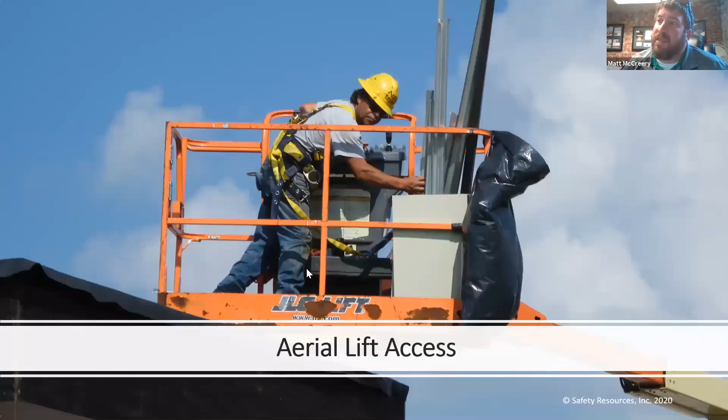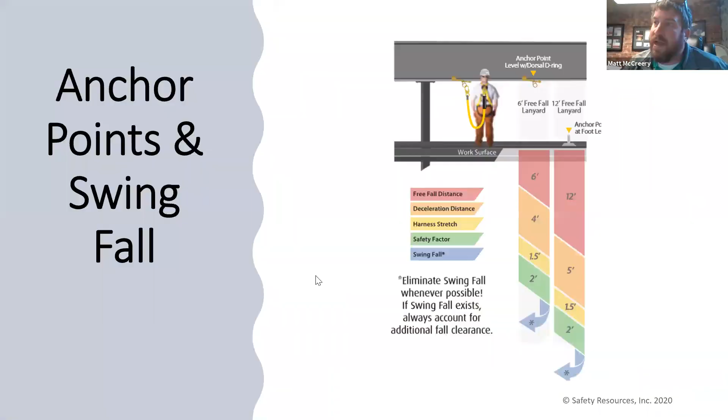So last time, everybody can see my PowerPoint. Yes, okay. Last time we talked about a bunch of different best practices, and I don't use PowerPoint like a lot of folks do. I try not to have a lot of text or words. We had a lot of pictures, and we had 22 slides that we got through, and it was like a discussion.

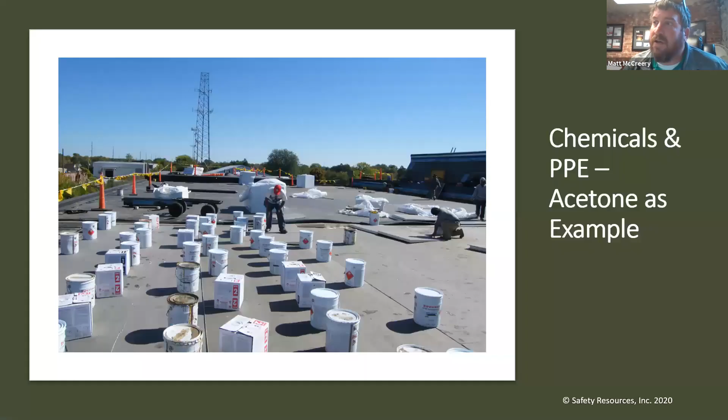Well, unfortunately for this week, or fortunately, however you guys prefer to learn, this week's a little bit more wordy when it comes to the PowerPoint itself. And there's going to be a little bit more reading here just because it's case law. I'm familiar with a lot of these cases from the past, but I also re-familiarized myself in the past couple of days preparing for this presentation. So again, bear with me on that.

Okay, enough of that. Let's actually get into it. All right, so where we left off last week was we were talking about best practices.

One of the coolest best practices I've ever personally been involved with was an incentive program with a roofing company, or two roofing companies really, but there's one that really sticks out to me, that kind of really worked for quite some time, but it did eventually have to go away, and I'll talk about that.

As a best practice, having some type of incentive program for your safety director or whoever's doing safety audits, a consultant, a director, project manager, rewarding safe behaviors while still encouraging safety reporting is very important. You can't have an incentive program based around injury numbers or accident numbers, because that would encourage underreporting, and OSHA has made that illegal, within the past 4 or 5 years.

The incentive program that I had in place that ran really well was based around actual observation. If I were to go to a job site, I had a little handy bag with straps, a book bag, whatever you want to call it, so I could climb ladders safely. And if the crew had 100% gold star, smiley face, a 100% safe job site, which for roofers isn't necessarily always the case,

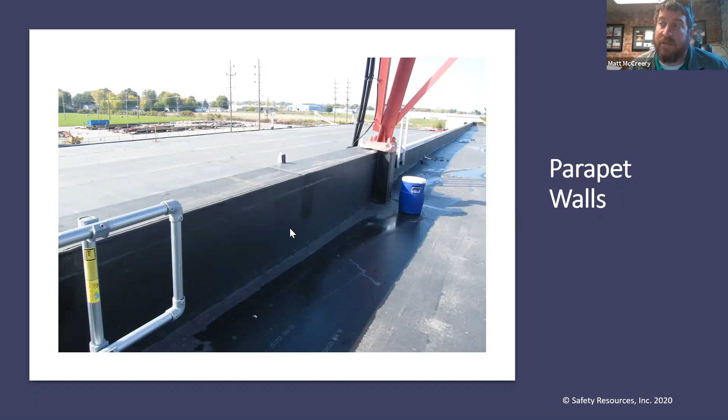That being said, as far as OSHA requirements and what they can cite, you have to meet that 39-inch requirement. So as a best practice, I would really encourage your estimating and project management team, before you even go to the job site, if you think a parapet wall is going to meet the fall requirements, make sure you actually pull out the tape measure and measure that system.

Each of these dockets can be researched. They're public knowledge. Once this PowerPoint's shared, you can copy paste these numbers into your Google browser or whatever you use, and these case laws will pop up.

The CO, the compliance officer for OSHA, cited this HST company for work around a parapet wall that did not meet the compliance guidelines, but their work at the time was very much specifically in the area where the parapet wall was of appropriate height.

As most of you should know, on a lot of our buildings, the parapet walls can go all the way up to 48 inches. They can vary a ton in different sizes and dimensions throughout the same building. I think that's an aesthetics thing for the architect, but if I could ever get into architects' ears, I would always say design the parapet wall to meet that 39-inch height requirement, and that's after your roof system is installed.

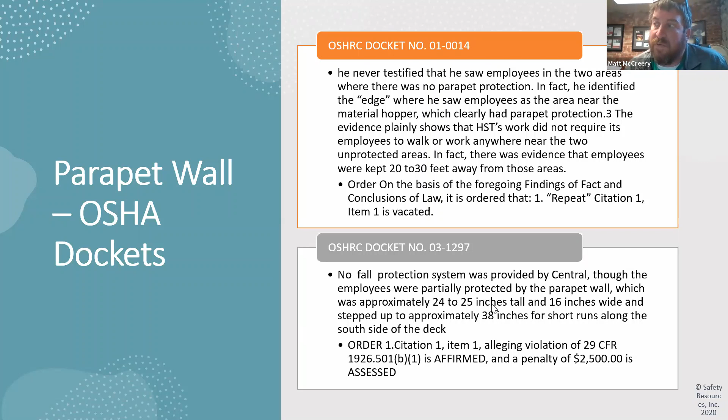So they went through this whole process of hiring attorneys and everything else to fight, in my opinion, an almost unwinnable case, trying to argue that a 24 to 25 inch tall wall is just as safe as a 39-inch tall wall.

So I wanted to bring that to light. And then there is the question of what is the interpretation of a wall. Another company, this is the bridge company - Central Paving was a paving company, this is Kokosing.

They claim that the bridge construction industry has always considered the bridge parapet wall, which ranges in height from 26 to 50 inches, as fall protection and in compliance with OSHA. So they went back to industry accepted practices and standards and tried to argue that this 26-inch to maybe 32-inch parapet wall met the compliance guidelines.

And the judge, in his conclusion - there's a couple pages of him arguing and explaining his case, but I just took the highlight here - said Kokosing's interpretation is rejected. Industry practice is not relevant where a standard such as 1926 501B1 prescribes employer conduct in specific terms and is not vague.

This line right here means a lot to me because it isn't vague. It does say that these walls need to be at least 39 inches in height. So a 37.5-inch wall or a 38.5-inch wall could be citable. So as a best practice, you guys need to have systems in place for parapet walls.

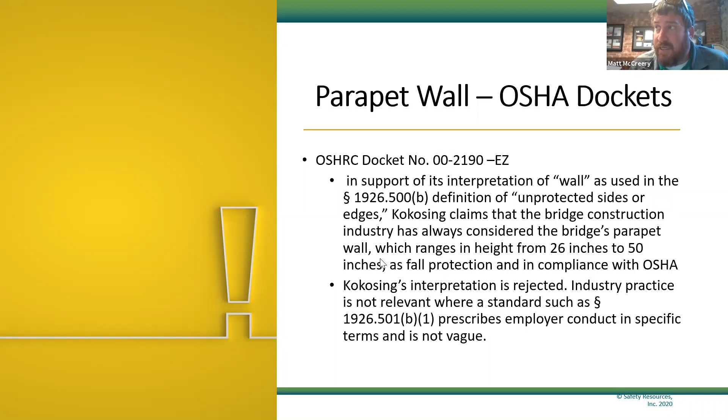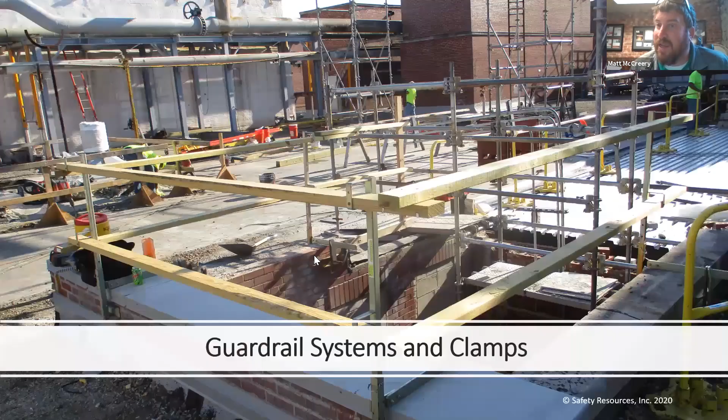Well, dang, I missed my guys from last week. They were, okay. Anyways, I love you guys too. All right, here we go.

Guardrail systems and clamps, this is an obvious best practice. This really works really well. It's a system that I've seen used time and time again to success. It extends the parapet wall. It allows the roofers to do their job without interfering. It takes out some of the guesswork with moving lines to 6 foot and back again. It removes some of the human error components of warning lines.

And of course, we talked about safety monitors last week and how that is never a best practice and really should not be used. So guardrail systems and clamps, again, if you haven't explored these systems, they've been called H brackets, they've been called a bunch of different things, but this is a system I've seen used to success quite often on large construction projects or even smaller roofing construction projects for some of our roofers, just because it made sense. Your roofers can work right up to the edge, never have to worry about any additional fall protection systems if you're using these correctly and within OSHA compliance rules.

Your other item would be fall protection carts. We talked about this briefly last week, which is, if you see that rope, we talked about shear angles. These fall protection carts very much have a working angle, and it's very much identifiable on the cart itself. If you're not working within that safe working angle, you're not working safely, and you're in violation of OSHA compliance, and you're probably putting yourself at risk.

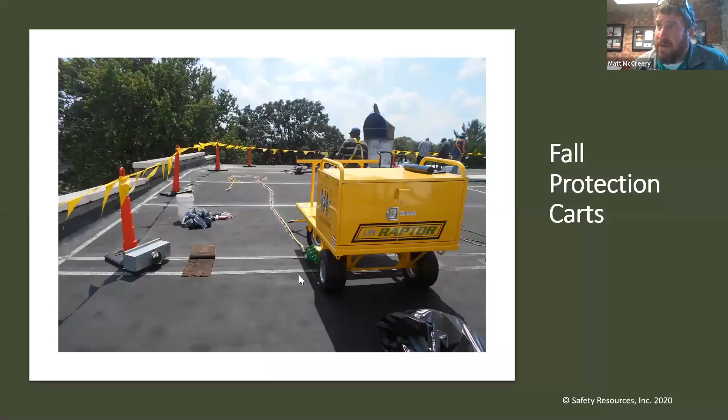Oh well, okay. So when we're talking about worst case scenarios on a roof, we talked about skylights and we talked about bad decking last week. And I told a story, and we don't need to rehash that, but I do know a lot of stories that I've not been necessarily directly involved with, but I have heard of, that revolve around fatalities or serious injuries with bad decking, roofers falling through something that has been rotted or structurally compromised.

And I wanted to talk about that. So the standard says, 501A2 says, before work begins, employers must ensure that any roof to be worked on has the strength and structural integrity to safely support workers. Sometimes it may be necessary to inspect a roof from the inside of the structure to identify integrity issues. That's what the standard says.

What we're going to get into is some case law that kind of really highlights some maybe holes in your all's safety program, and even some of the things that I've done, and say, okay, well maybe we should take it one step further on some of these buildings, especially buildings that we're intimately familiar with, that we know that we have issues with.

So like your maintenance contracts, a lot of you commercial roofers love your maintenance contracts with these large manufacturing and warehousing facilities. Well, some of these facilities are very old, and you may have some additional knowledge that needs to be passed on to the workers. And how do you do that? And how do you make sure that the decking is safe for people to work on, and that it can support the intended loads and all that?

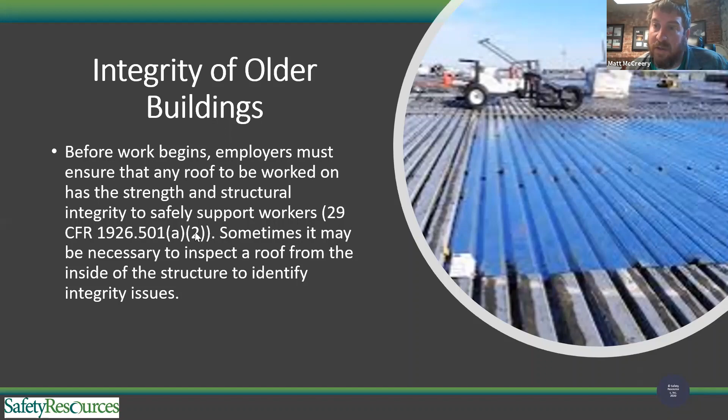So, this is a roofing contractor. You can look up the docket if you want to know who it is. I refer to them here as the company.

They had a fatality on a job site where they were replacing concrete deck panels. The manufacturing facility maintenance people would look up and see damaged roof panels, and they would call this company to come out. They would drill holes on either side of the panel, slide 2x4s vertically down into the hole with a rope system. That 2x4 would then toggle over to be horizontal, and then they would lift those panels, set them down, take metal decking, and repair these bad sections of roof. Which first off, I thought that toggle was pretty interesting. I've never seen that. I learned something while researching this.

What happened was they had set this panel that they were replacing on the south side of the work area. The south panel that they set the damaged panel on was also damaged and ended up collapsing, probably because of some additional weight.

But the citation here, and again I have a lot of information on this one, was upheld, just to spoil it for you all. The company did receive a citation for the fatality, based on the fact that they should have done a better job of the assessment.

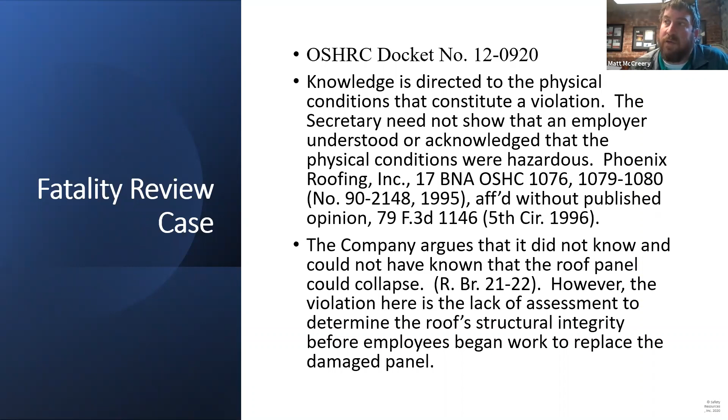So the company argues that it did not know and could not have known that the roof panel could collapse. However, the violation here is the lack of assessment to determine the roof's structural integrity before the employees began work to replace the damaged panel. The standard requires assessment of an employee's working surface prior to allowing an employee to work from that area, as evidenced by Mr. Keith's testimony.

That was one of the other roofers on the job that was not killed, obviously. This was not an emergent problem. The damaged panel was scheduled to be replaced after the last ventilation unit was installed.

Because Superior, that is not the company, that is the owner, had previously identified the area of the damaged panel, the company knew the nature of the work to be done and its general location on the roof. Further, the company's foreman knew that Mr. Cousey did only a visual appraisal of the underside of the roof from over 60 feet away.

So their assertion was that they did an assessment of this bad decking from the factory floor 60 feet below the work area. They could see some damage from the underside, but in order to locate that damage, they had to get onto the roof, and they were actually able to find the damage because of some pooling water in the general location where they identified this damaged panel. So again, 60 feet away, I understand why maybe the judge said okay, that's not a good enough assessment.

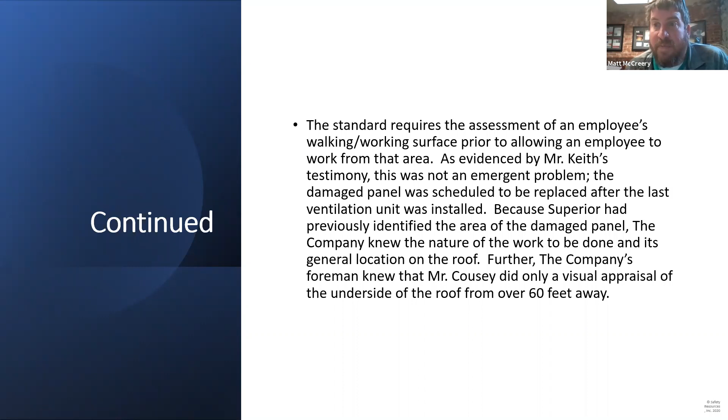The company, through its foreman, knew the area immediately surrounding the damaged panel would be a walking working surface for its employees replacing the panel. Now, it did in this OSHA docket say that while they were replacing the panel and setting up the new stuff, they were tied off 100% of the time. However, once the new panel was in place, that tie off came off because, again, this fall didn't occur through the actual opening of the hole. It occurred through the actual structural collapse of the adjacent panel.

So the company knew the roof was over 50 years old. It had performed repairs and replaced other panels over many years. Furthermore, the company was familiar with this building and aware that the factory floor was over 60 feet below. The judge says a reasonable assessment at a minimum would require an examination of the underside of the roof at a distance much closer than 60 feet. Therefore, he concluded that the company knew it had not assessed the walking working surface for its structural integrity.

So I've been on pre-construction walks for owners just like this, where we're looking at bad decking and we know that there's some of it out there, and we're looking from maybe not 60 feet, but 30, 40, 50 feet. This may be a case where, as a best practice, you take this one step further and have some type of documentation process, checklist, whatever it may be, to actually document that the roof has been assessed in certain areas, that the bad decking has been determined, exactly where and where not to work or to walk without fall protection.

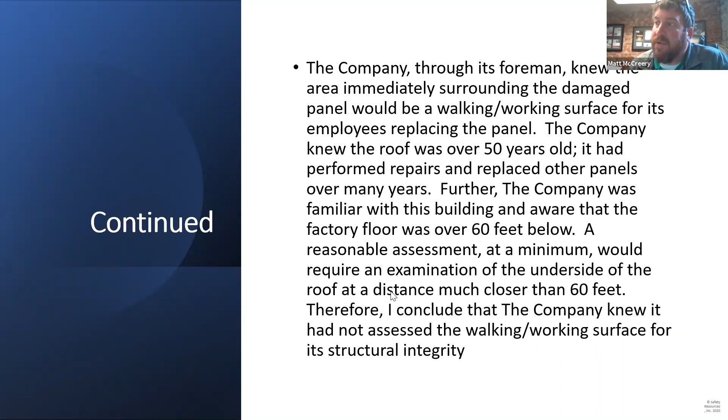There was another item here I was going to talk about on this slide, but I'm spacing a bit. Even if the company had not had a foreman on site who knew that an assessment for structural integrity was not done, it could have known this through the exercise of reasonable diligence.

We talked about reasonable care last week, I'm not going to reiterate that, but as discussed above, this was a scheduled replacement of a damaged concrete roof panel. The company had a long work history at this factory, knew the age of the roof, and knew that an aerial lift or similar equipment was needed to adequately assess the roof's structural stability.

So what they're saying is that the roofing company should have known that a closer assessment should have been done in this area where the concrete deck failed.

It also goes on to state the company was a roofing company and thus is aware its employees frequently use the surface of a roof as a walking working surface. The company generally asserts that it did an inspection of the roof prior to its employees' work to replace the damaged panel. The company does not explain how its cursory visual assessment qualifies as an appropriate inspection to determine the roof's structural integrity as a walking working surface.

So if you have documented something, that's what I was going to say on the previous slide. This does not necessarily have to be engineered, you don't have to get a structural engineer to actually determine the structural integrity of the roof. But you do need to make sure that it's not just a cursory visual inspection that says, hey, there's bad deck, go for it.

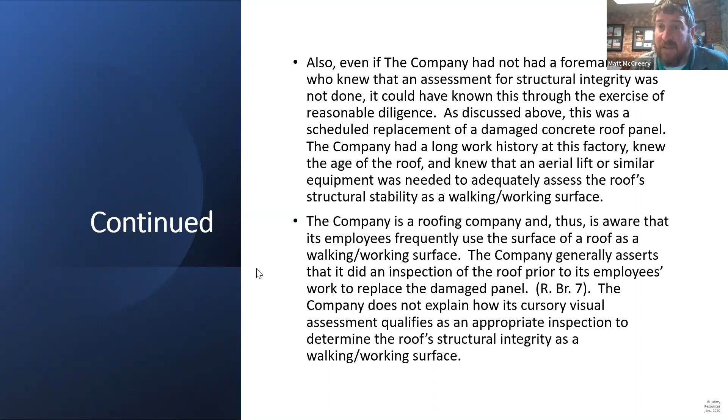Maybe that's something that you guys can take out of this and make into a best practice, and maybe that saves a life ten years down the road or whatever. I do think it's important.

Hey Matt, there's a question in the chat. Can you see it or do you want me to read it? I cannot see it because I'm minimized. If you could read it.

Dennis has a project now in bidding with compromised decking, rusted and damaged, over acid tanks, with a confined space area below. Is fall protection and an initial assessment enough? Wow, that's like Batman stuff, like falling into the vats of acid.

Okay, so we know it's rusted, we know the decking's bad because that's why it's being replaced. So I literally just got done saying that an engineer is probably not required on some of this stuff, but that one's so unique. If I'm the safety director for that company, I'm probably taking one additional step and asking the owner, especially at bid stage, what the live loads are for that roof in its current condition.

Or the live loads or the snow loading, whatever, however you look at that. Because obviously we've got to put material up there, we've got to put people up there, and we've got rusted deck above acid pits.

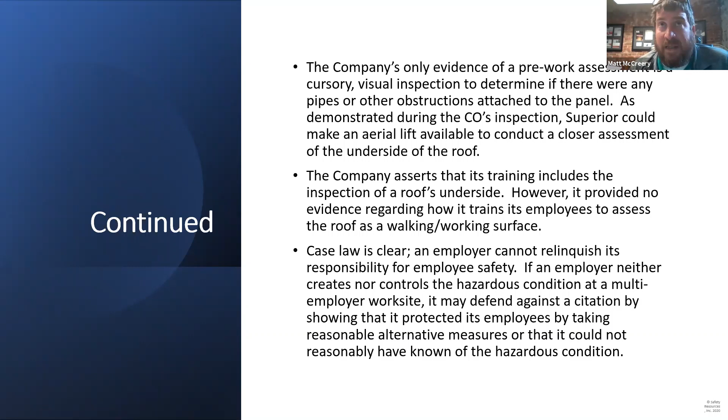Let's just say we need more information for sure, Dennis. I think due diligence, I think again, if you're sitting in front of a judge and you're trying to argue, because you had a fatality on this, that you did everything you could possibly do to ascertain the structural integrity of the roof, I think that you need to take it one step further and ask for at least some type of information from the owner.

So if it's still in bid stage, that would be something that I would ask as part of the RFP process or RFQ process. I hope that answered the question. That's a tricky one, but we know it's rusted and we know that there's a corrosive underneath.

I'm not even really that comfortable getting on the roof to assess it, but again, I don't know exactly what the gauge of the corrugated steel deck is and all this other stuff. I don't know how often people are up there, et cetera, but there is a reason that they're replacing the roof, and it's probably because it's not structurally sound anymore. So hope that answered the question.

That's a really good question. Dennis, if you want to talk offline about that, I'd be happy to discuss it because it's interesting to me.

The company's only evidence of a pre-work assessment was a cursory visual inspection to determine if there were any pipes or other obstructions attached to the panel. They didn't look at the underneath side to make sure they weren't going to cut through electrical conduit, or worst case scenario, something like a PSM factory where you have chlorine.

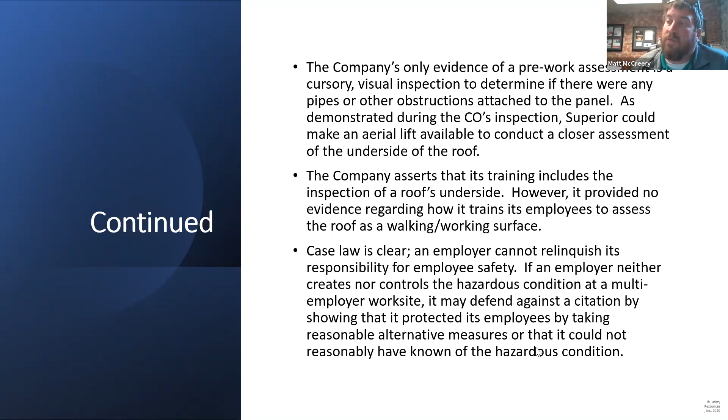Again, in Dennis's situation, that would go out the window because they have disclosed that they have acid pits, there's corrosion, etc. So we know we have a hazardous condition. Now we have to take reasonable measures or reasonable care over that.

The company's own expert — this is a 30-page case, by the way, so these are just highlights — the company's own expert acknowledged that using an aerial lift to get closer and look at the roof's underside is better than a visual assessment from over 60 feet away, obviously.

But that made this case, because it was their own expert who kind of threw them under the bus in this particular situation. He said, you may not be able to catch everything from the ground. That's from the deposition.

So the judge found that the company did not take reasonable actions to assess the structural integrity. They did not conduct a proper assessment either before they started the work, to remove the damaged panel, or when the damage to the adjacent panel was revealed.

That's something I didn't actually put in here, but when they removed the actual damaged panel they thought was damaged, they noticed the panel to the south had some exposed rebar and was starting to flake away. At that point, maybe a further assessment should have happened, but that's actually the panel that ended up failing and causing this fatality.

So he concludes the terms of the standard were violated. Again, this is a really interesting case to me.

I highly encourage, honestly, if you're a safety director, or even if you're just interested in this kind of stuff, to read that case.

It shines some light on things that — I've been doing safety for 15 years now — and it kind of reminded me, oh hey, I understand we need to train roofers on fall protection, ladder, scaffold, HAZCOM, OSHA, fire protection. I understand what we need to train roofers on specific equipment, like the different D-ring anchors, as we talked about in part one, the roof carts, the parapet walk. We need to train all that.

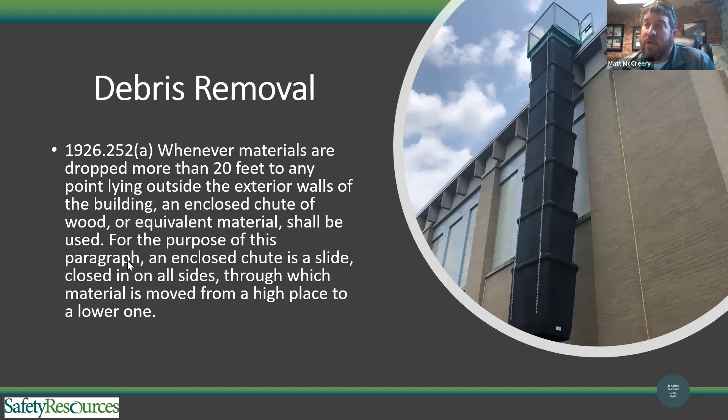Okay, I wanted to talk about the first man up rule, and how everybody has a different opinion on it, including people in OSHA. You talk to OSHA guy A and OSHA gal B, and they're going to have probably a different opinion on what this is and how it can be implemented safely without violation.

You may talk to Matt McCreary with Safety Resources, and you could talk to Chris Hall with Safety Resources, who's also been here for 15 years, and we've been working together for 15 years, and we probably would have different interpretations on this. So I'm going to go with my interpretation of it, because it's not an OSHA standard per se. It's a gray area.

So what I always encourage my clients to do is set their fall protection system before any other work begins. If you establish your warning line system or tie-off points before any other work begins, I think you're meeting the spirit of the first man up rule.

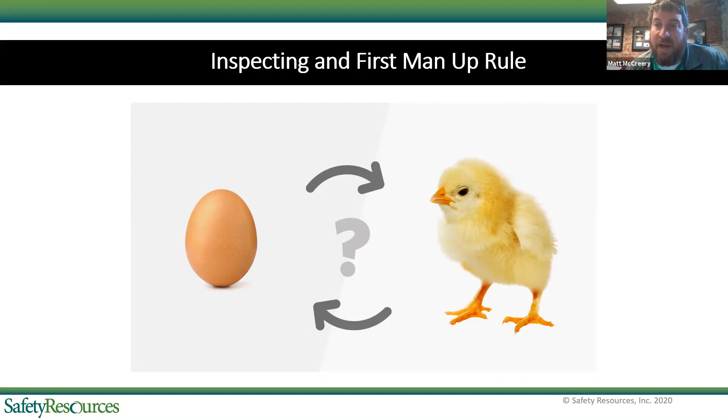This is an important exemption every roofer should be aware of, and I'm sure you are. You're allowed to be up on a roof inspecting prior to and after the work's complete without any additional fall protection. You do not have to have fall protection as long as you are inspecting, investigating, and assessing workplace conditions before the actual work begins or after work has been completed.

As soon as one of your people picks up a tool and starts doing any type of activity considered roofing work, then you have to meet the compliant guidelines of 1926.501.

Since they are most likely to be able to accomplish their work without going near the danger zone, requiring the installation of fall protection systems under such circumstances would expose the employee who installs those systems to falling hazards for a longer time than the person performing the inspection or similar work.

Let's say I have to go and measure a parapet wall for flashing or coping, and it's a 16-inch parapet wall. I know it's not fall protection, but for me, in order to establish a fall protection point, tie off, and then come back and repatch it if I don't — all this stuff just to take one simple measurement — they exempt you for that.

Again, if you're investigating and assessing workplace conditions before and after, there's an exemption there. If you're not familiar with that, it's definitely something you should be familiar with, and also something you should train on. You should train your estimators as much as your roofers, because they're exposing themselves just as much on these types of things.

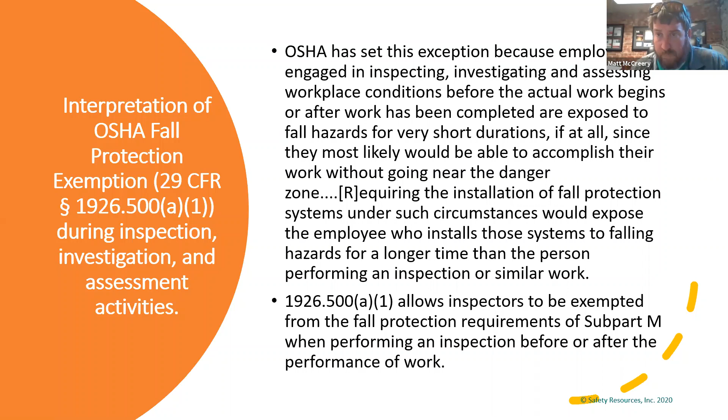The first man up rule is the employer's designated, trained, and suitably equipped qualified person assigned to access an elevated workplace more than 6 feet above a lower level for the sole purpose of installing a personal fall arrest system to protect those workers that follows.

Similarly, the last man down is the designated person to pull up that last anchor and to patch that last hole in the roof if we were using penetrating anchors.

I would contend that the last man down or the first man up is exempt from fall protection rules. Now, have I challenged that through administrative law? No, I have not had the pleasure of going through a contest case for that particular situation, nor do I really want to.

But I don't know how you do it otherwise—the chicken or the egg argument, what comes first. So I wanted to bring that up, thought it was interesting, and feel like it's something good to pass on to other safety people.

These last few slides are just slides that I want to make sure that we're aware of.

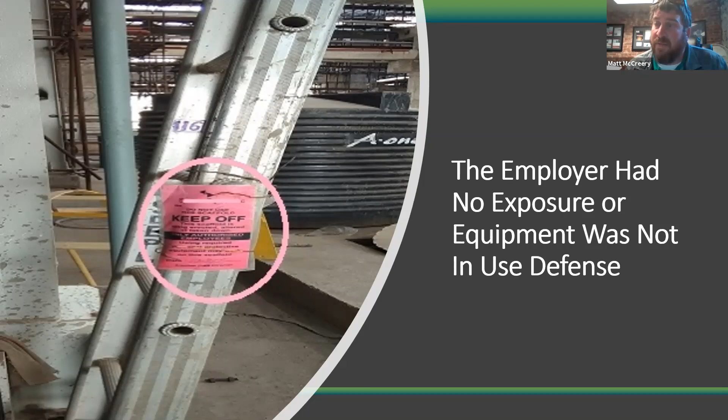Gary talked about training, but this just popped in my head. Make sure we're training folks, especially if you're doing remodels, your people need the 2-hour asbestos, 2-hour lead, aerial lift, and forklift certifications done every 3 years. The aerial lift certification standards changed recently, so make sure you're looking into that ANSI MEWP standard. There are slight changes, but enough to throw us for a ride on how we can't necessarily train status quo anymore. We have to change a little bit how we do it, mostly around familiarization of the lift and how we document that.

It's a 70-degree day here in Indianapolis, beautiful, a little windy, but we're coming into summer. I want to remind you all, best practice, make sure all of your employees get a toolbox talk on the symptoms of heat-related illnesses. If we're talking about what actually hurts our people the most often, for roofers, it's this. This is important, and I wanted to throw it in before we wrapped up, because it can lead to death, but it can also mess people up, is all I'm saying. Make sure you're training on it, and make sure it's documented.

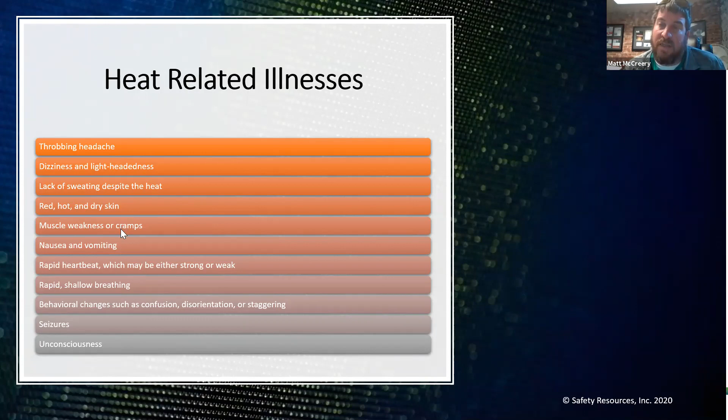In best practices part 1, we talked about the carbon monoxide poisoning issue. Remember, make sure your people are trained not to have any of that stuff indoors. I know sometimes we're working on roofs that have some indoor components, so make sure we're not using gas-powered equipment on there. And of course, heat is also a factor.